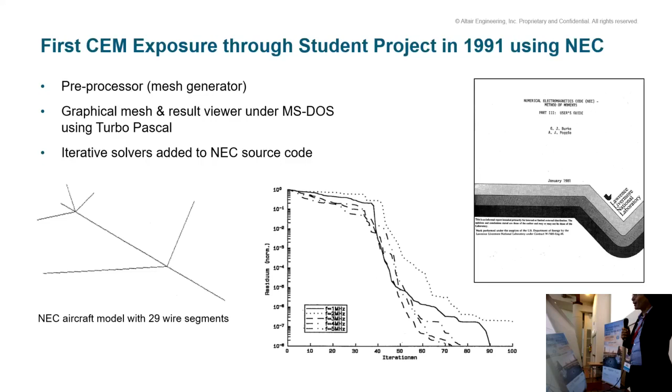What you see here is an aircraft model back then, with 29 wire segments, and this was useful. As time passes, I will show you later - 34 years later - these are the type of aircraft models we solve with all the details.

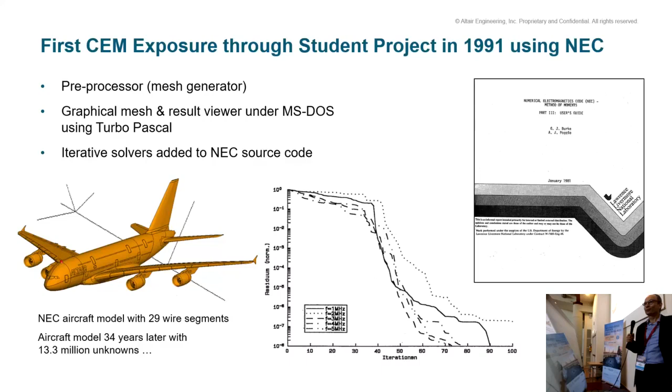Sometimes everybody inside wants to have wireless communication, so one does propagation modeling inside, to decide where to put the wireless repeaters. I just saw last week one of our results - of course, the most important people in business class sit in front, and you must make sure that also in the very front seat you have the best radio coverage, good data bandwidth. Interestingly, this model has 13.3 million unknowns. With the advances in computing power, which I'll show later, it almost takes the same time to solve this problem - from 29 unknowns to 13.3 million, much more accurate.

So this is a bit the underlying theme of this presentation, to take you through evolutions in the methods and the computation. Just to round off my personal story, in the same year, 1991, I started my master thesis, and I was tasked - I think we were actually the same research group - with a German ministry funded R&D project on EMC, shielding, truck cabins. So I started to write a software, with RWG basis functions, which became FEKO, based on method of moments.

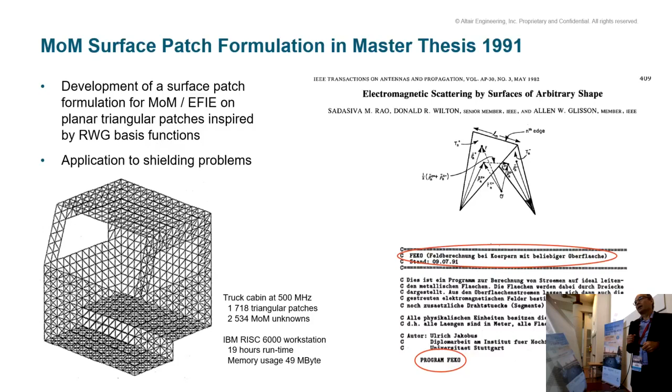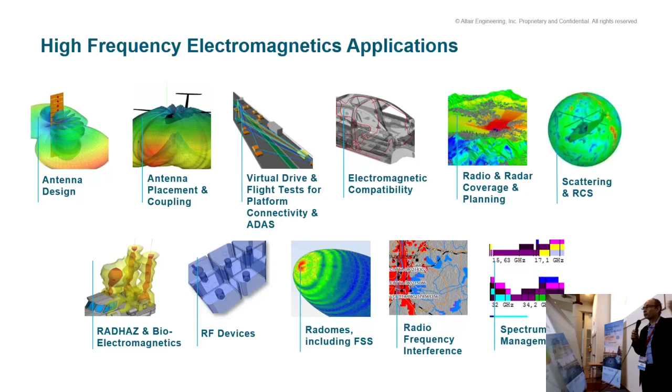Of course, there are many more problems apart from EMC in radio science, computational electromagnetics, antenna design. Very important to take the environment into account where the antenna operates - antenna placement, looking at unwanted effects, not only from EMC, EMI, cable harness coupling, but also bioelectromagnetics, and I see there's another plenary talk on that. Up to, as I've already mentioned, propagation modeling for in-cabin scenarios like in an aircraft, but also, of course, mobile communications within urban and rural environments.

All these problems can be classified a bit by the complexity - simple wire antennas up to very complex structures with many materials. But also a very important criterion for computational electromagnetics is the so-called electrical size, that's the size in terms of the wavelength - is it electrically small, electrically large?

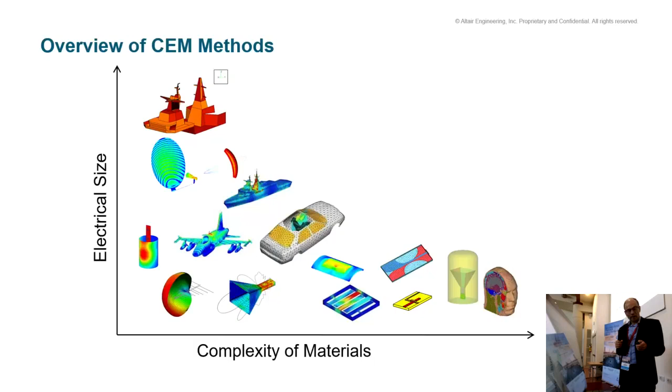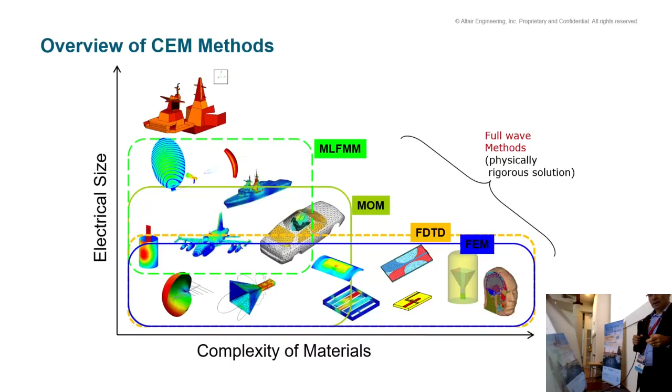Dependent on which problem one deals with, there are different methods, many more, that can be classified as full wave methods - finite element method, finite difference time domain, method of moments, accelerated versions like AIM or MLFMM - but there are also high frequency methods based on optics, physical optics, ray launching, geometrical optics, or some call it shooting and bouncing rays, uniform theory of diffraction. What is very attractive is actually to combine these two, because sometimes you will have a simple wire antenna mounted on a ship, and there is not one method able to deal with both - this is kind of the combination, combining different methods to solve the same problem, taking all the mutual coupling into account.

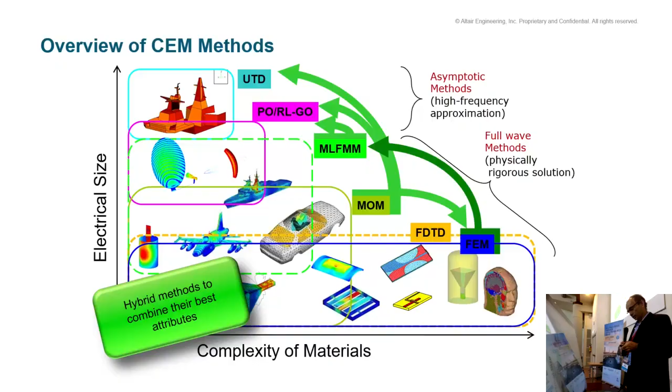The first, and I'm really touching on the high level in this presentation, on the different methods. First combination, and it's very popular, done by many research groups for many years or decades, is combining finite element method with integral equation methods, or also the accelerated version, MLFMM.

The motivation for doing so is sometimes one has complex problems like human phantoms, different materials, volumetric problems, exposed to electromagnetic structures which can be closed like a cell phone. Then actually everything can be solved with finite element, finite time domain, but it can also be far away, like here, this is human exposure to a base station antenna, which might be 10 meters on top of a building across the road or something like this.

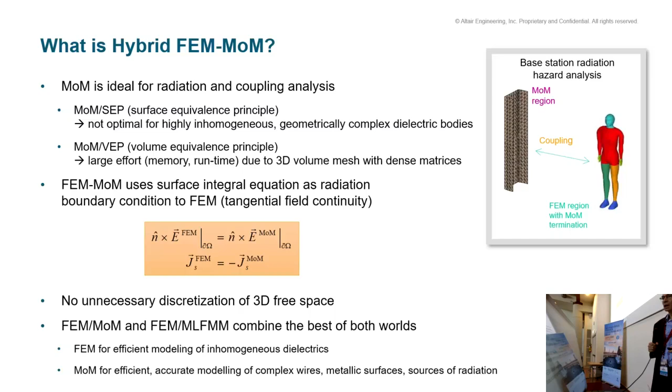And there again, for these type of metallic structures, integral equations are very suitable, but finite element discretizing the whole space, the whole road, the airspace in between, will blow up the computational problem. So coupling these methods, leveraging the best of both technologies, is a very attractive way of doing so.

You see here one example. This is a human body exposed to an MRI system. There is a bone implant, and one can, with this hybrid method, model the electromagnetic fields in these MRI systems with integral equations coupled into the human phantoms through finite element.

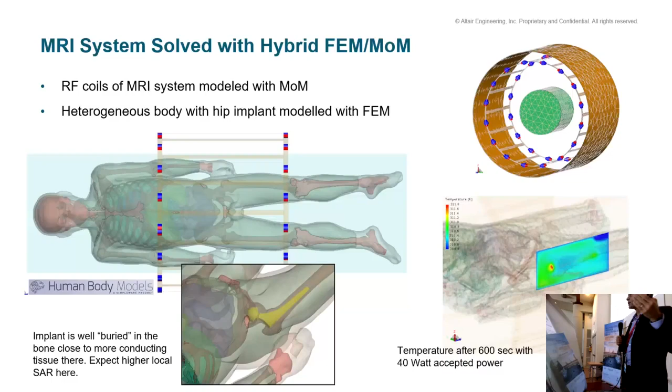I will only later touch on multiphysics, but this is already the first example. Knowing the field distribution around that bone implant, one can couple with thermal solutions to also get the temperature distribution, which is really the critical quantity to ensure it is safe to put patients with such implants into such MRI systems or not.

Another hybrid method, and this is also where I personally through my PhD got involved, is combining full wave methods with high frequency asymptotic methods to solve problems that are electrically large. I think this evolution over the last decades, what is electrically large, what is the boundary where a full wave method is still acceptable to use, has shifted tremendously.

There's almost this constant, an engineer is willing to wait a night for a result. Earlier it was a small problem you could solve overnight, or maybe sometimes you can afford to wait a weekend - you submit a job on Friday, but Monday you want the results. These days, of course, much larger problems can be solved full wave.

But I think what is interesting is in communications, frequencies get always higher and higher. We are now already doing hundreds of gigahertz, terahertz communications. The problems people are interested in solving are getting larger and larger. Earlier you were fine to model an antenna in a small region around it. Now you want to model the whole aircraft, the whole ship, in ranges of gigahertz. So this is why these methods always remain relevant and important, just the boundary where they are used shifts.

Combining method of moments with physical optics is very attractive because both of them are based on modeling or representing currents as an intermediate quantity before then in the second step evaluating the scattered or radiated electromagnetic fields.

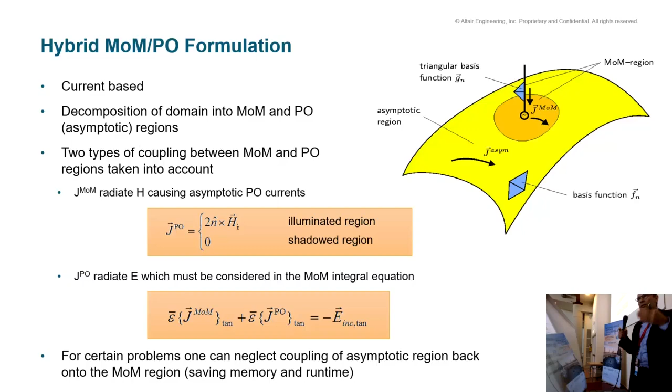This can be solved as a closed form system, changing the method of moments matrix equations. It is also possible to do that, we quickly jump to this slide, in an iterative way, very much as I just described it. Both methods are good.

And here just one example. This is a Cassegrain horn antenna with a subreflector, main reflector. The horn antenna and the small first subreflector are assigned to the method of moments, or in this case MLFMM, the accelerated version of the integral equations region. The main reflector is dealt with physical optics.

Also by doing it this way, one avoids having double reflections in the PO region, which can sometimes be time consuming. You see here three results: the blue reference solution, everything full wave; the red hybrid method, MLFMM and PO; and another solution, the dashed line, which we call large element physical optics. This uses mesh elements that are a few lambda in size with phase variation, not electrically small elements. Overall, all three methods agree very well.

This is a zoomed view around the main beam. You hardly realize there are three curves. Only if one looks far away at the side lobes, about 70 dB below the main level, is there a difference with the dashed line. But this is not because the solution is inaccurate. It's because we use a large mesh, a few lambda, to represent that curved surface, so we are actually solving a different problem than the other two solutions.

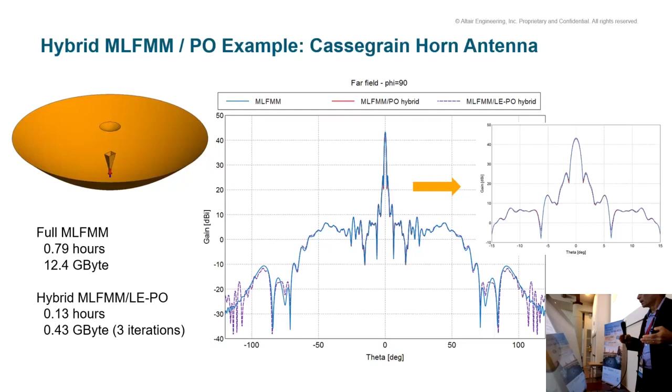Shooting and bouncing rays, or ray launching geometric optics, is also a technique used very often and popular for electrically large systems, and it can be hybridized with the method of moments in a similar way to what I just described. It basically launches rays from a source, which could be a point source antenna or an incident plane wave field. These ray beams interact with the geometry. If these are metallic structures, there will be purely reflection, similar to the PO currents. There could also be metallic dielectric structures with partial penetration, transmission, partial reflection, and so forth, with multiple bounces. One can complement these techniques with creeping waves, edge diffraction, adaptive ray splitting, and other fancy things.

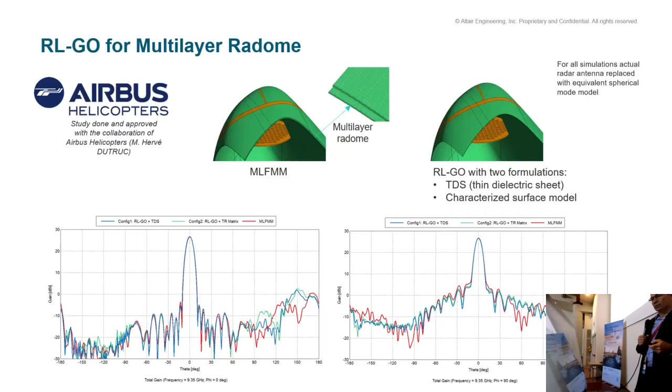Just an example, again comparing with full wave. This is a project modeling radomes around the front section of a helicopter with frequency selective surface elements to protect weather radar antennas and so forth. You see here a full wave solution with a multi-layer radome, including the FSS structures. On the right, you see shooting and bouncing ray methods, where one can accelerate the solution by creating lookup tables, evaluating the reflection and transmission coefficients of such radomes as a function of frequency, angle of incidence, polarization, and using those as part of the ray structure interaction formulations. You see very nice agreement here too.

I want to point out another improvement that has emerged in the last few years, similar to what I referred to earlier with the large element physical optics. Also here, the higher the frequency, normally the more rays need to be launched to still satisfy Nyquist criteria, having at least two rays hit the structure per wavelength or so, which again provides a limit if the structure gets really electrically large.

Here we have a whole ship at 10 gigahertz, and we look at the near field exposure radiation hazard in this area. This is the near field plot. By combining different methods, we launch electrically large ray beams which can really be 10 to 30 lambda in extent, and these big ray beams hit the structure. Sometimes they will hit a uniform, flat, smooth surface, and nothing needs to be done other than making sure one properly evaluates the radiated fields accurately over this large cross-section.

It's of course not sufficient to represent it by a single point integration. There might be situations where the ray beam partly hits an edge and partly misses it, so we need adaptive splitting and other fancy techniques. With such operations, in this example, instead of 442 million rays, one can reduce it to 367,000, meaning a factor of 230 faster in runtime, without any change in the results.

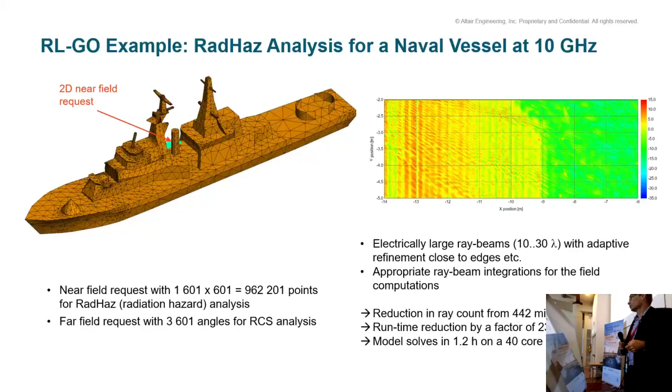This is now the last method I'd like to introduce quickly, which is the uniform theory of diffraction, also around for decades. It's not ray launching in some grid onto the structure and letting it interact. It's really having a source point and an observation point, then finding the rays through ray tracing that are either direct line of sight, reflection, multiple reflections, diffractions, creeping rays, and so forth. Traditionally, one often has canonical objects, and geometries need to be relatively canonical to apply UTD principles.

There have also been evolutions to apply UTD to general, arbitrarily curved structures, like here, where it's not so easy to identify what are the flat parts and where the edges are, and so forth.

But it makes it much more realistic, and this is the expectation. Nobody will buy into the next generation of antenna design if you use a crude model like this.

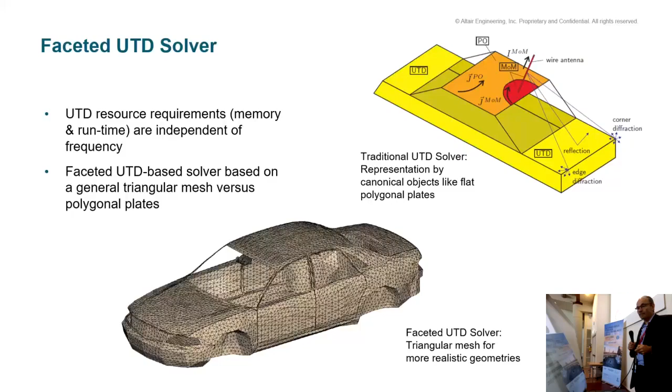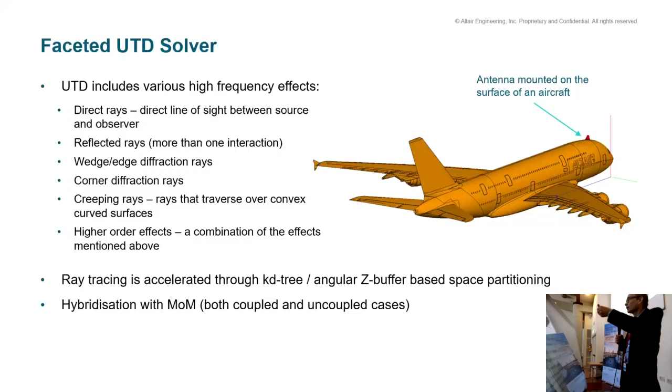This is where I come back to a more modern aircraft, now not with MLFMM, 30 million unknowns, but purely UTD. There have been many methods and extensions, especially on the geometrical processing side, to accelerate ray tracing, which in this case is often the bottleneck—not the computation of fields, but finding the rays in the first place.

I want to show one example, a method which is truly frequency independent. If you solve a structure—this is antenna placement on a helicopter—at 1 gigahertz or 2 gigahertz, nothing changes except the fields that are computed. But the rays, if the mesh and geometry are the same, the ray paths are the same. So this method is truly scalable as frequencies go up, and it's very attractive in terms of runtime.

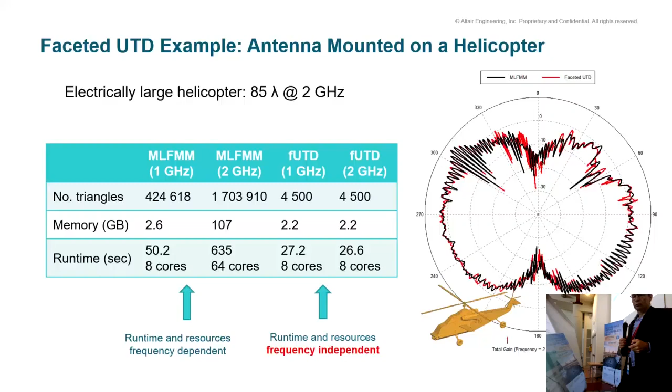What makes it more challenging is combining it with full wave methods. It's easy with physical optics, where everything is based on currents. Here, some structures are based on UTD with fields and ray tracing, and others on currents. So one needs special hybrid basis functions to model the connections.

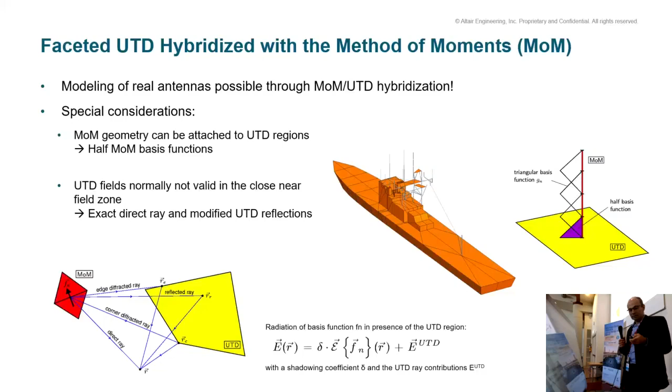Also, sources for UTD normally need a certain separation—they need to be in the far field. But if you have antennas mounted on a structure, you're not in the far field, you're actually connected. All of this can be solved, and one can get very accurate solutions.

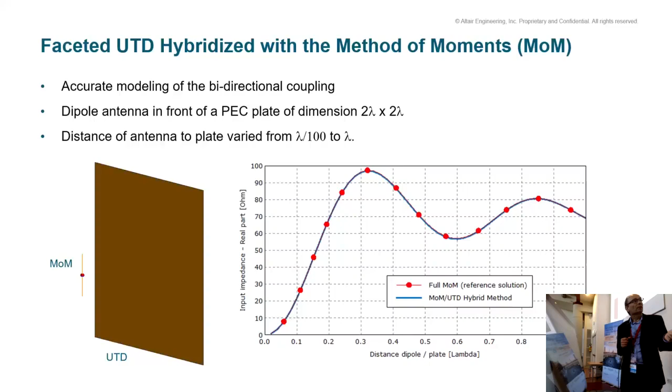This shows a simple academic problem: a UTD plate, method of moments, dipole antenna, with the distance changing. This shows the input impedance of the antenna, full wave compared to the hybrid method, taking all the coupling into account—you see very, very close, almost touching. It still works perfectly.

Concluding this general overview of different computational electromagnetics methods, full wave and high frequency, I want to move on to some problems which remain challenging with these methods, but where there are special solutions. Unfortunately I had to be very restrictive in what I select, given the time constraints, and I try to be relevant to the challenges practical antenna design engineers face day to day.

One of those, for the last 20 years, has been that nobody wants to drive around in a car with antennas sticking out that can be broken—you forget to move it when you have your car washed, and it's broken. As more communication systems evolve, all these antennas are integrated somehow.

One of these technologies is to leverage the wires. Often, due to the heating system in the rear window of a car, there are already wires embedded, and one can leverage these as integrated windscreen antennas. It might look simple, but in reality it is not, because this is not just a glass with one wire printed on top. It's a multi-layer structure, with up to 7 different layers of different complex materials.

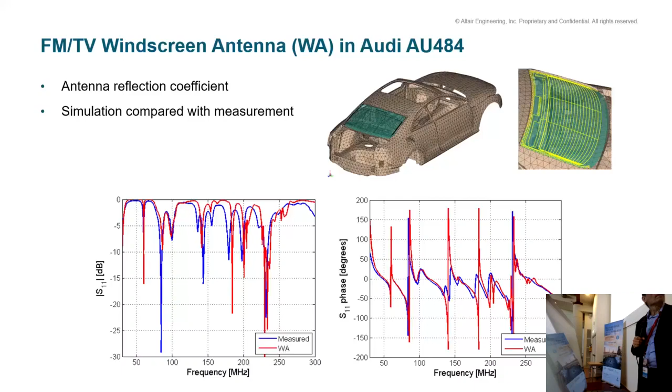Another challenging but very relevant problem is modeling electromagnetic interference susceptibility for cable harnesses, combined with other structures like a windscreen antenna. So this is, for instance, a windscreen antenna and a car structure, and in a car, of course, it's not just these two cables—you have kilometers of cable harnesses with complex bundles and multi-layer hierarchical structures.

There can be individual wires which have a shield, and they are part of another higher level bundle with another shield. Modeling this is extremely complex. You can't just say we'll discretize everything—kilometers of cables with multiple wires and multiple hierarchical shields, it's impossible. It's possible for a simple setup, like one wire in the laboratory running on a table, such as a CISPR 25 setup, but in reality it's not.

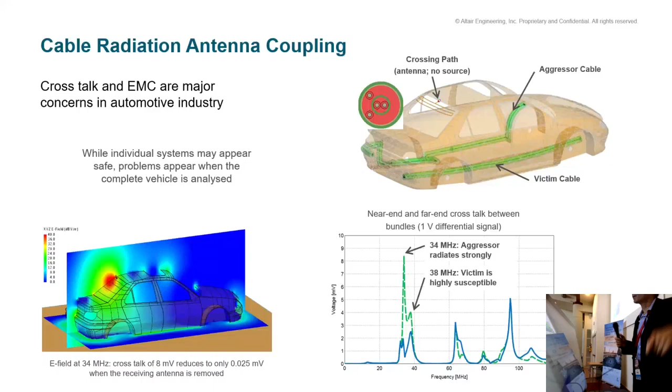But also here, luckily, there are solutions. One can combine full wave or asymptotic electromagnetic techniques, touched on earlier in the presentation, with MTL, the multi-conductor transmission line theory, which converts all these internal details of complex cable bundles into an equivalent SPICE network of circuit elements, which can be solved with a SPICE solver.

So essentially, the electromagnetic field problem is reduced to solving the interaction of the structure with the outer shield, which is represented as a single wire, one could say. With the transfer impedance, one can go into the interior of the cable, the outer cable shield, and solve everything inside with a circuit solver.

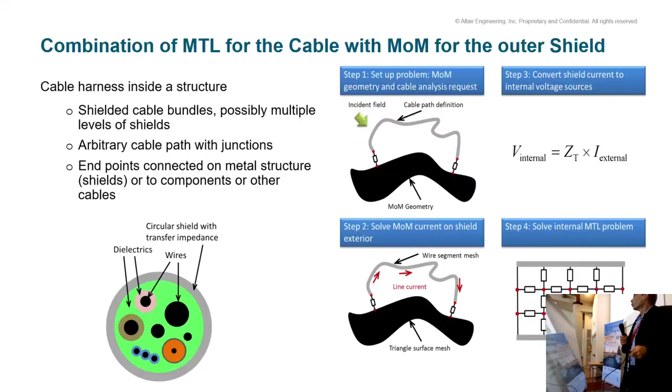Also here, it's important—if you do that, you end up with SPICE net lists which can have hundreds of thousands of circuit nodes. We've compared, for instance, Berkeley, the original Berkeley SPICE solver, or NG-SPICE, the next generation SPICE, an open source project. One can use those general purpose circuit solvers, but one can also tune and optimize a circuit solver tailored for these types of net lists that emerge from cable harnesses.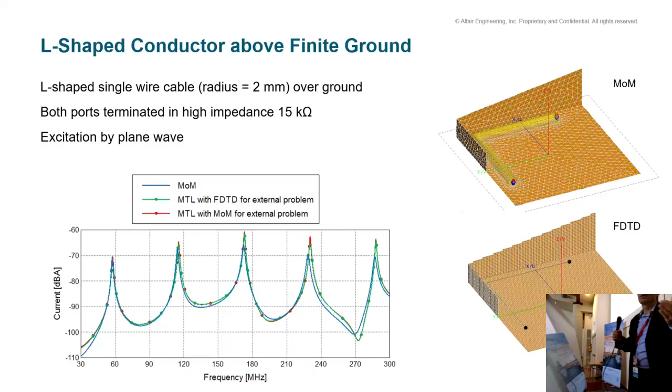You see here, for purposes of EMC coupling, reasonable agreement. It's not perfect—there are some differences for some reasons, but people dealing with these problems are very happy to get this type of accuracy. More complex problems can, of course, be solved. Apologies, we can't really see the cables here, but there are actually some cables running. These are cable ports, and one can look at the induced currents—applying these techniques to more complex problems.

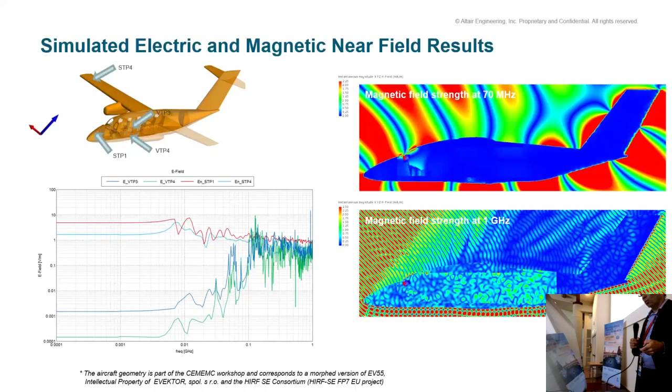Another more advanced feature is not only splitting up a problem and using different methods, as in hybridization, but going one step further to really do model or domain decomposition. A nice example is here.

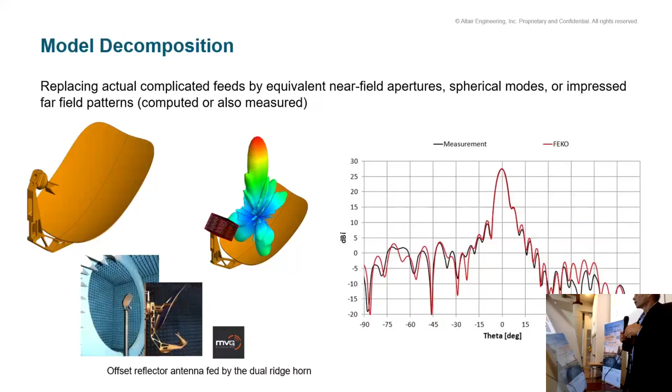A feed structure illuminating a reflector, a dual-ridged horn structure, where one can even combine measurements and computational electromagnetics. In this case, the horn antenna was measured, the near field was collected on a box around it, and this equivalent near field aperture was used in the computational electromagnetic solution as excitation to look at the interaction with the reflector.

But this kind of splitting up domains is not only limited to combining measurement and computational electromagnetics. One can also apply the same principle to splitting up a large complex electromagnetic problem as such. This shows, for instance, a slotted waveguide array—very similar to the earlier helicopter example with shooting and bouncing rays. Here we have again a slotted waveguide array example as a radar or weather radar antenna.

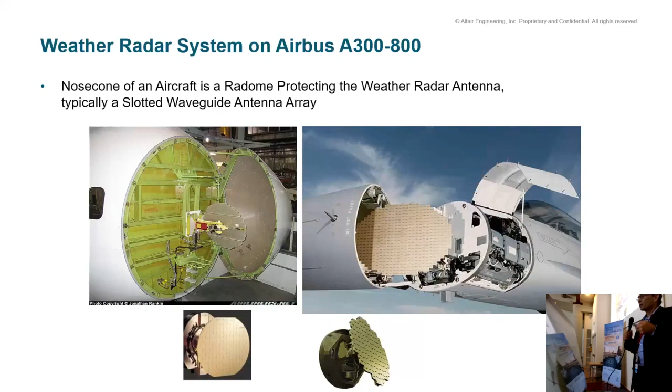In the front section of an aircraft, there is a radome which has frequency selective surface elements, and solving the whole problem can be too time-consuming and might require too much memory, so one can split it up. As a first step, solve the slotted waveguide antenna in free space, obtaining near field on an aperture, spherical mode representation, or even a far field pattern, as in the early example with measurements.

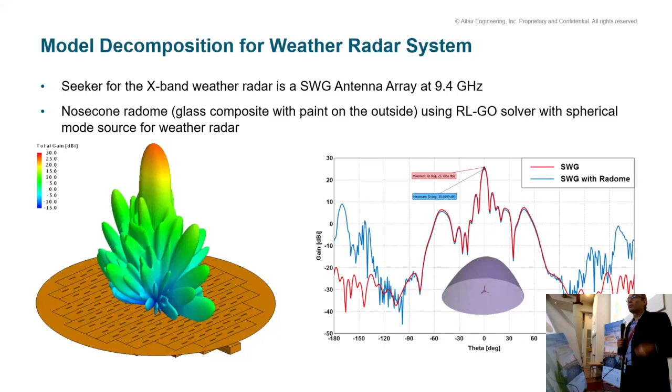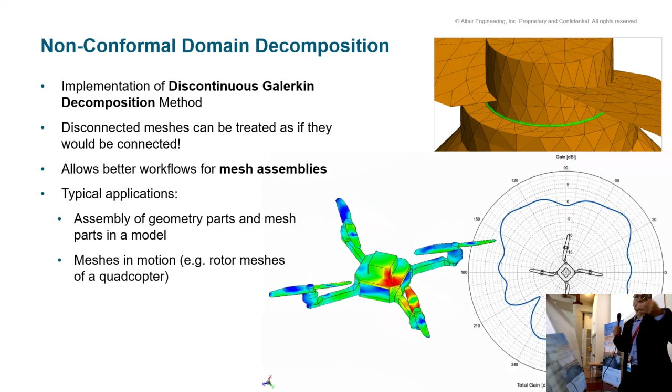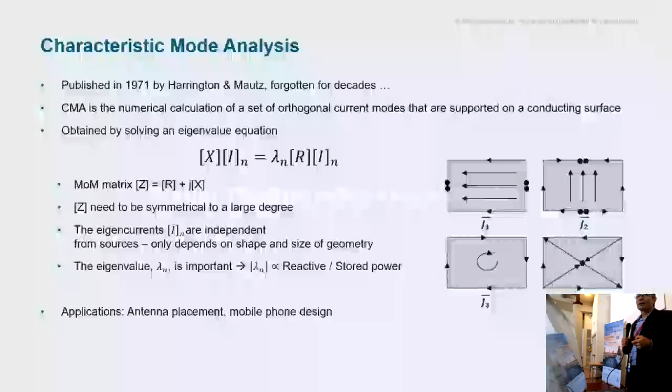I thought I'd put this part here on characteristic mode analysis, which is also a kind of advanced solution. It's not new, it was developed in 1971 or earlier. There was some work by Garbacz, and then Harrington and Mautz published it in 1971. But nobody really seemed to care, nobody knew what to do about it, and it got forgotten. But in the last 10 years it really came back as a very powerful tool to understand how structures can radiate and how antenna design can be mastered efficiently, leveraging not only the antenna but the whole structure.

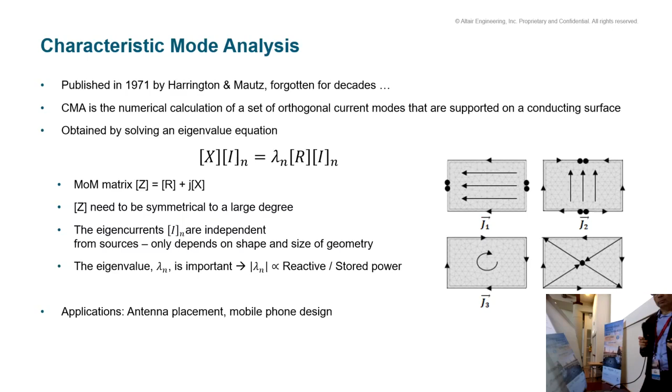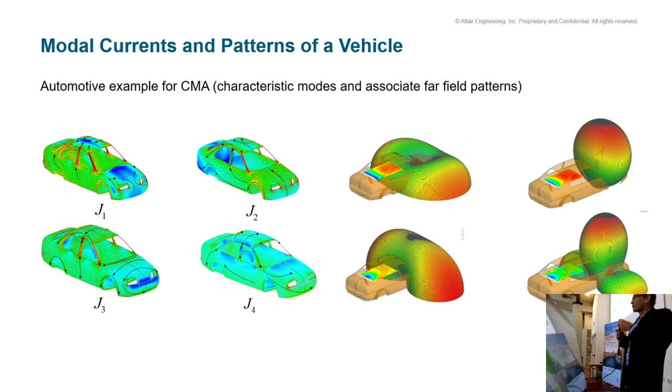Essentially it's based on method of moments, splitting the method of moments matrix into real and imaginary parts, solving an eigenvalue problem, and one gets these so-called characteristic modes. Each mode also has a far-field and near-field distribution, and knowing how a specific structure can be excited and can already radiate allows, in a much more intuitive way, to excite those structures through antennas and leverage not just the antenna, but the whole structure.

As part of these advanced methods, an evolution has also happened over the last decades related to propagation modeling. With our ever more connected world, with IoT sensors, mobile communications, wireless LAN, evolution from 5G to 6G and so forth, it's always more important to have sophisticated and also fast models. Sometimes people want real time, as certain things move around, like a car moving in a city, one wants real time evaluations of certain communication systems.

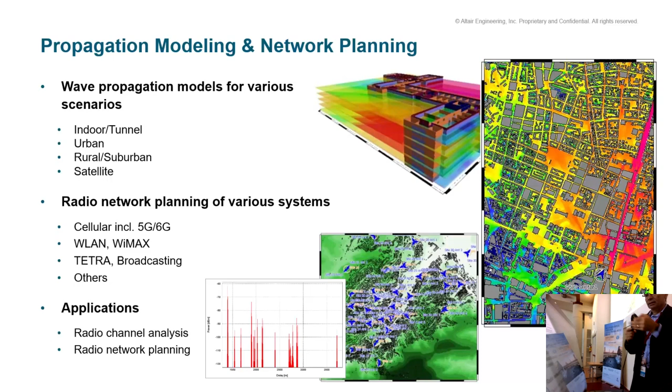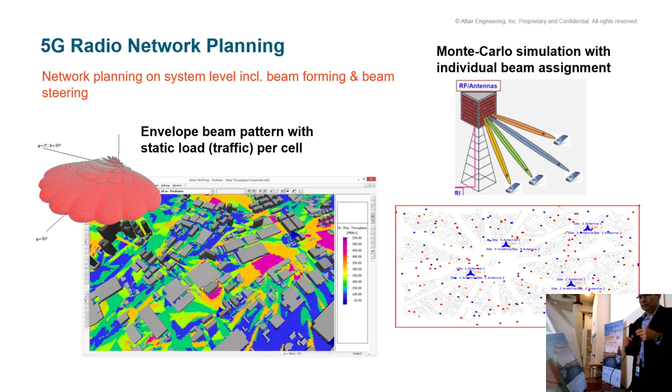There has also been an evolution in different technologies based on what I introduced earlier, shooting and bouncing rays, ray tracing, and many heuristic propagation models that can describe these different things. For 5G and 6G it's even more complicated, combined with different beam steering and multi-beam pattern antennas. There are also special sessions and papers here at this conference about reconfigurable intelligent surfaces, where one can have passive arrays mounted on walls that selectively steer the beam in certain directions, where there's maybe a group of pedestrians needing more bandwidth and coverage in a specific street not directly visible from the base station.

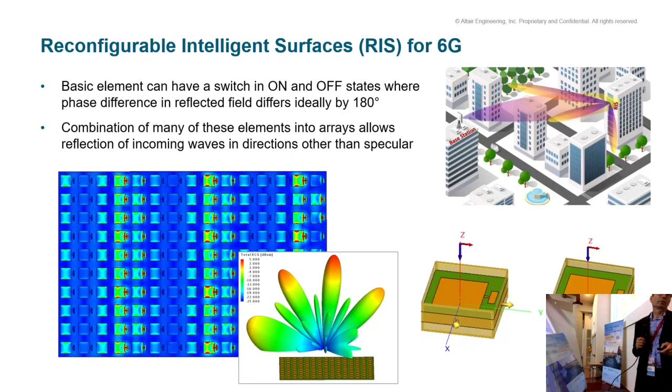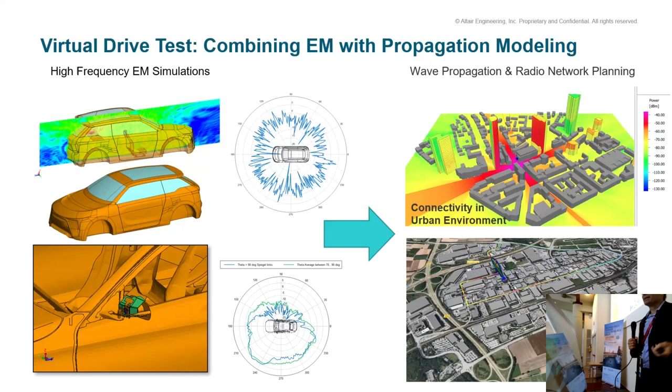All these are, of course, supported and driven by the advances in computational electromagnetics. Combining, for instance, what I touched on earlier with the windscreen antenna, this is now another modern design of hiding the antenna in the outer mirror. One can also use the methods I introduced earlier to compute radiation patterns of such an antenna, put that vehicle in an urban scenario, let it drive around with ray tracing combined, and replace or complement these drive tests with virtual drive tests in the computer.

This shows one result of a measurement campaign and the corresponding simulations. It's important to notice that if you repeat the measurement five times, you will get five different results. There might have been rain, the ground suddenly wet, completely different conditions. A truck might pass by at one position, causing blockage for a few seconds, and if you drive the same road an hour later there might be no truck at that position, or one a bit earlier instead. So it's really a few dB up and down, nobody cares, it's about looking at averages.

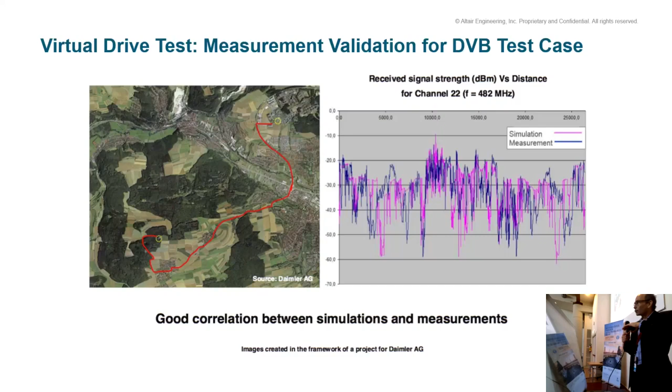I think I like this story very much, showing that computational electromagnetics is not only relevant on Earth. This was a study by NASA Jet Propulsion Laboratory ahead of the Mars mission, looking at the communication link between the Mars Perseverance rover and the Ingenuity helicopter. What is very important, as this helicopter is flying around on Mars, is that it does not lose the radio communication link to the base station, because otherwise the base station can't tell it anymore, please turn around now - it will just be lost. That, of course, has a huge impact.

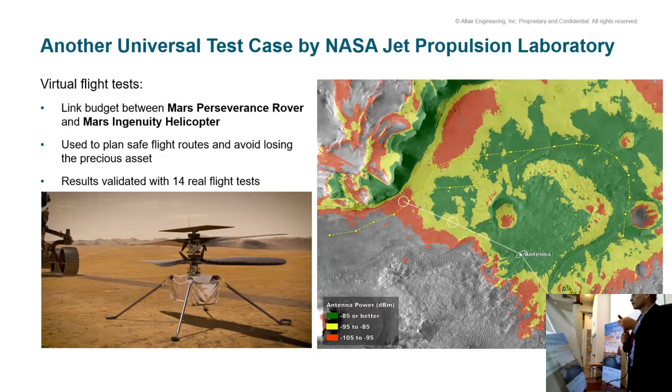So they did a lot of propagation modeling studies on Mars. I don't have all the results, but when the mission happened, it was recording the signal strength in real time while on Mars, and later on they were comparing it to the simulations done ahead of time, and it matched really well.

Leaving that block of computational methods and some advances, let's touch a bit on some multiphysics structures. I had already shown the thermal impact of EM fields for that MRI example. Sometimes there are also pure structural mechanical implications, like here a radio astronomy antenna, which is of course a big massive structure which has weight, and depending on the angle there is a different effect of gravity. Gravity causes deformation, there might be wind impact, so one can actually combine computational electromagnetics with structural analysis - for each position, look at the deformation, use the modified geometry, repeat the electromagnetic analysis, and you can actually see changes in the radiation pattern just due to these deformations.

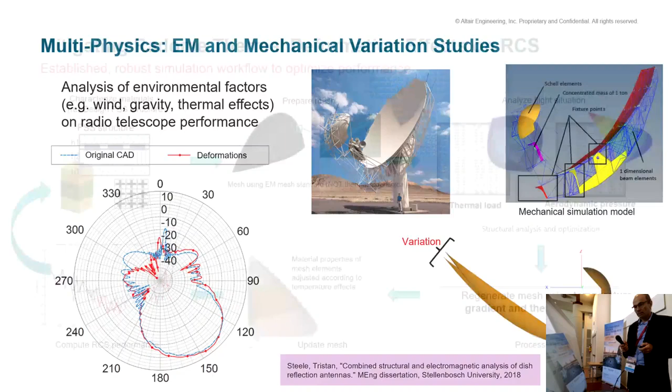Another multiphysics coupling I want to show is again related to radomes, which I had already two other examples of in this talk. A radome is not standing still on Earth - typically a radome in front of an aircraft, and this aircraft will fly. In flight there is aerodynamic pressure, which causes deformations, but also causes heat. That heat will change the material properties, so it's also a kind of multi-dimensional coupled multiphysics problem, where the electromagnetic properties of the radome change if you measure it in an anechoic chamber on ground versus if you operate it in flight at high speed with all these impacts. Also, by coupling different electromagnetic, structural and thermodynamics codes, these problems can be addressed.

All these multiphysics electromagnetics codes or numerical algorithms rely, of course, on computing hardware, high-performance computing. I've put here a bit of the evolution from the 90s up to today of the top 500 supercomputers, and this gives the lowest of these 500, the average, and the top computing power expressed in floating point operations per second. Every grid here is a decade, factor 10 faster. So you see already here, we have gone through a huge evolution in the last decades.

But I think it's important to realize there is a benefit which one gets for free out of that. But, and many of you are of course active in this domain, I think it's always still very important - and this is actually my first bullet item here - one needs to have smart and powerful algorithms in the first place, like going from an n-squared or n-to-the-power-of-3 algorithm to something like n log n. That will always beat any advances in computing power. And you can still leverage, of course, the advances in computing power as an additional acceleration. So this is always where to start.

But then once one has a great scaling algorithm, which is still accurate enough for the given problem, then one can and should, of course, leverage all those modern architectures like distributed and shared memory parallelization, GPU computing, use special libraries where others have provided low-level assembly level mathematical algorithms, and so forth.

Coming back again a bit into history, I was privileged enough in 1997 to get access at the Computational Center at the University of Stuttgart to a Cray supercomputer. It was very expensive - every CPU minute one was billed and had to justify why one needs this. And I was able to solve this problem there.

Let me explain a bit. There is an automatic landing system at the end of the runway at an airport, and it provides the signal for incoming aircraft to land.

And it's a highly sensitive signal. It's almost like the incoming aircraft is on a null of the pattern of this system.

But of course, as you all know, you've been sitting there for half an hour waiting for takeoff. Along the runway there's the taxiway, where aircraft queue up to wait for their turn to start. These aircraft next to the runway are kind of electromagnetic scattering objects.

This is what is indicated here in red, the error due to the presence of these aircraft. And it's very important, of course, not to have a disturbance high enough to affect the incoming aircraft landing along or next to the runway, but to still have a safe incoming flight.

So I was solving this problem on a Cray T3E supercomputer, method of moments, 36,000 basis functions. This machine had 512 CPUs. Back then, of course, one CPU had one core. I could use 384. It was running 1.7 hours, so the CPU time was 27 days.

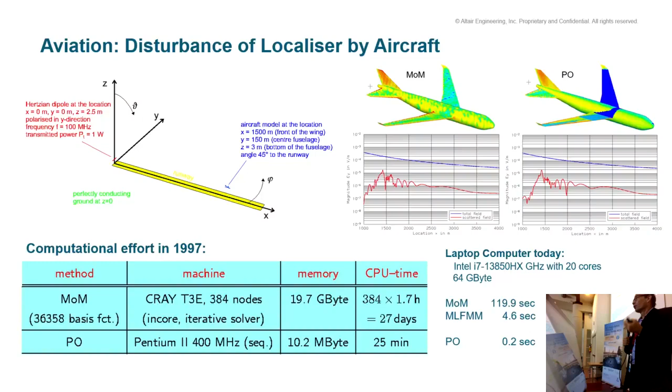With MLFMM, it's even less than 5 seconds. Physical optics, fractions of a second. So this also shows, in practical terms, not just these graphs and floating point operations, what it means in terms of impact for computational electromagnetics, what the advances in computing power have brought us over the last couple of decades.

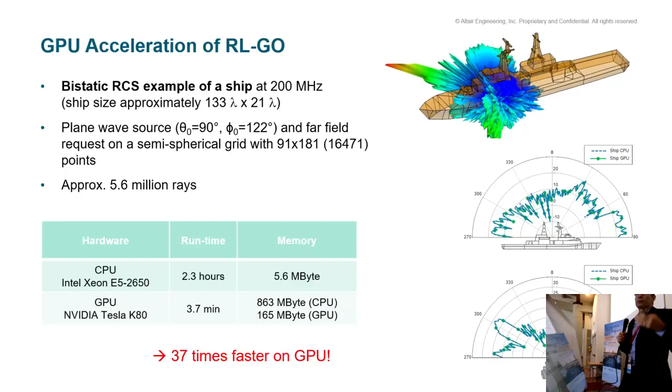GPU acceleration, I have just one example as part of shooting and bouncing rays. Here it's about 40 times faster leveraging GPU instead of CPU for a shooting and bouncing ray problem.

My last block before coming to the conclusion is devoted to AI and ML, where one sometimes hears these fears or slogans, oh, this will replace all engineers in future, all the decisions will be AI-driven. There are, I think, and I would hope I can show this to you, certain elements where it can really help to get to better solutions faster, but it's really only complementing traditional solutions like measurements or computational electromagnetics to create certain data points.

And machine learning is actually nothing that fancy, it's more mathematics. You have a set of data, either existing historical data that was collected, or data generated through measurements or computational electromagnetics. One trains machine learning models, has other data, evaluates whether the model is sufficiently accurate or not. If not, there's an evolution, a retraining phase, and in the end it's applied, and it's also important that one knows the bounds of confidence within these bounds.

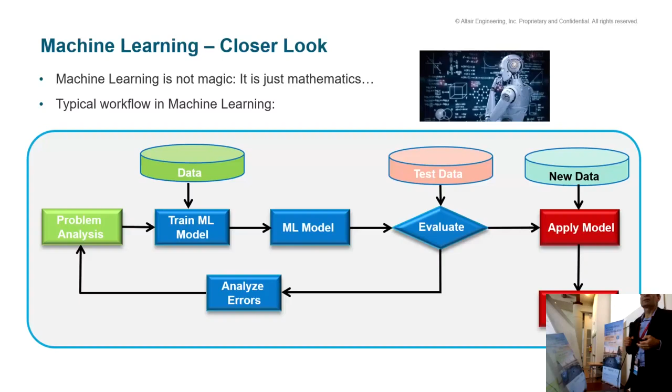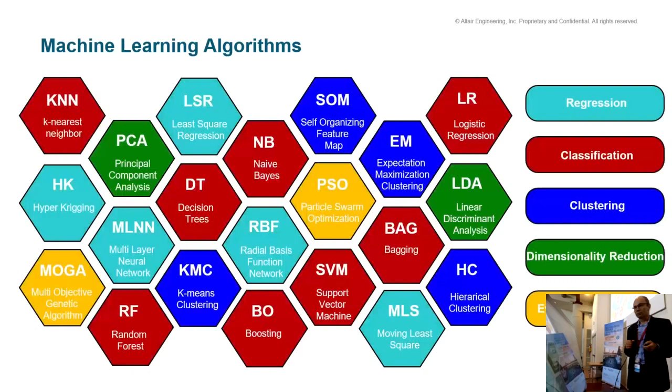It can be applied also to new inputs to create results much faster than if you have to build a prototype and do measurements, or redo your computational electromagnetic simulation. There are many, many machine learning algorithms, of course, way beyond the scope of this presentation to discuss. They can be classified into certain groups, but I would just like to show you a few examples.

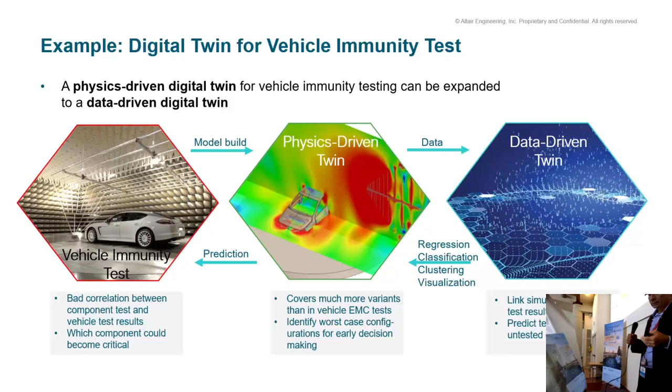The first one is more related to data processing. Often one is challenged by the complexity of certain problems. So this is an EMC related vehicle immunity test. There's a vehicle exposed to electromagnetic fields, and one has to decide on certain critical aspects.

Let's go to this example. There are different components in this vehicle, and of course in reality there are even more. Here in this test, 30 different components or different positions were considered. The frequency is, of course, a variable here, 20 to 400 megahertz, with different polarization of the incident field and orientation of the antenna.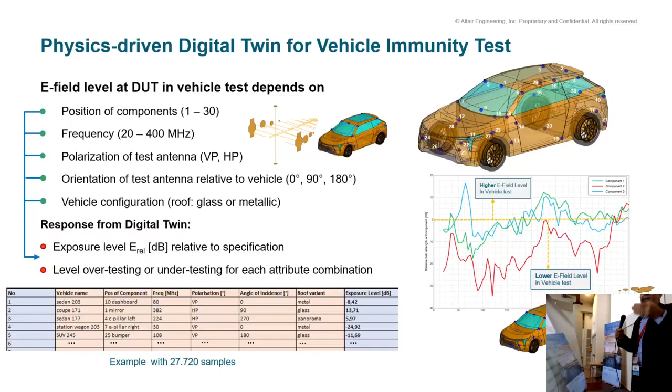But also, as you all know, if you order a car, there's not just one car. There are many different configurations and versions. Some have, for instance, a sunglass rooftop, others have metallic glass or metallic roof, and all these different combinations give you a huge number of variations. It's almost impossible to cover all those through numerical simulation, but yet you want to know what is the critical combination, is my specific device safe to be used?

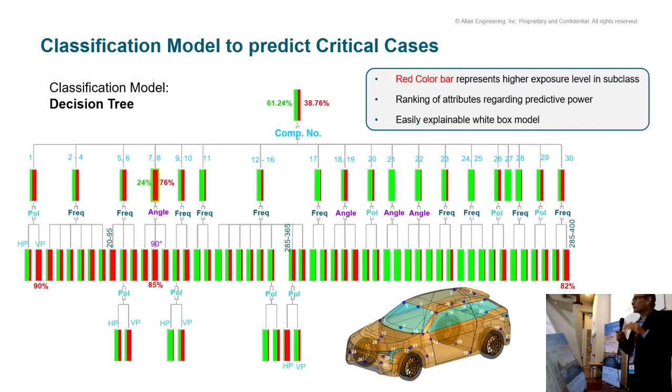Here it helps with machine learning and decision trees. For instance, just an example, to identify what is the critical combination, which component at which frequency for which car model is something that might exceed certain safety limits.

Another example where machine learning can really help reduce simulation time: an integrated radar antenna that was designed with many different parameters, widths, lengths, separations. When you manufacture it, there will be tolerances, and the task was to determine the sensitivity, whether certain combinations of tolerances would push the antenna outside the design specifications.

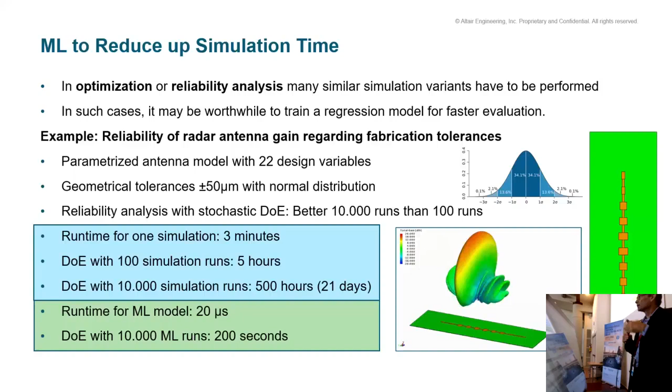You can set up a parametric study, a design of experiments, varying all these parameters. With heuristic assumptions, if one simulation takes 3 minutes, 100 simulations take 5 hours, and 10,000 combinations would take 21 days, scaling linearly with the number of combinations. But a machine learning model can be evaluated in about 20 microseconds, so 10,000 combinations would take 200 seconds instead of 21 days.

Another example relates to radar cross-section and design of stealth aircraft, though it's a bit difficult to see here. These are all different aircraft designs, some with longer wings, others with different tail sections. This is available historical design data that was used to train machine learning models.

These machine learning models, and this is very important, you shouldn't just blindly trust them. One needs to validate and verify with data sets that were not used to train them, to check whether results are still within the range of confidence. If yes, one can apply the model and get corresponding results in fractions of seconds.

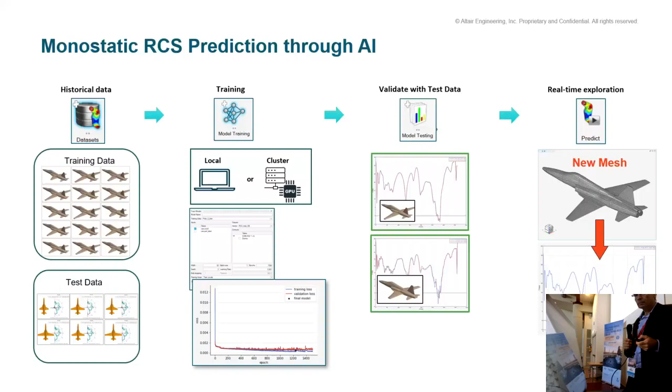The last example of how AI and machine learning can be used relates to setting up a 5G network communication system in downtown Munich. The goal was to reduce from originally 11 base stations to only 5, while still giving sufficiently large coverage, with a threshold of receiving field strength level of minus 80 dBm. With machine learning optimizing the positions and orientations of the antennas, that goal could be achieved.

This reduced power requirements significantly, which again has a huge impact on cost and operating costs for setting up such networks.

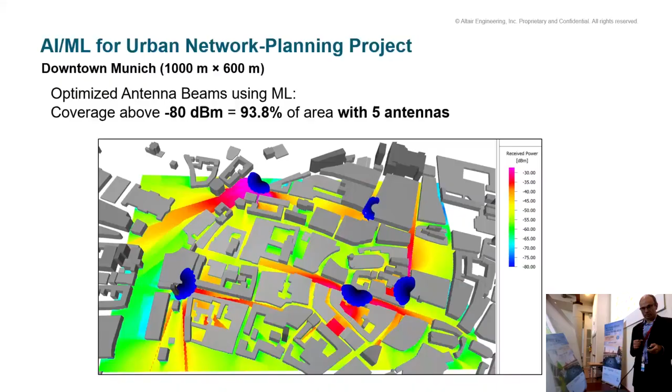With this last example of machine learning, I'd like to conclude and summarize this presentation. I started by giving an overview of computational electromagnetics: full wave methods, hybrid methods, high frequency asymptotic methods, and the combinations through hybrid methods as they have evolved over the last few decades.

I showed some challenging examples like windscreen antennas and cable harness modeling, where through other means very efficient solutions are possible, other than brute force application of computational electromagnetics. I also touched on multiphysics use cases, high performance computing, and in the last part, AI and machine learning.

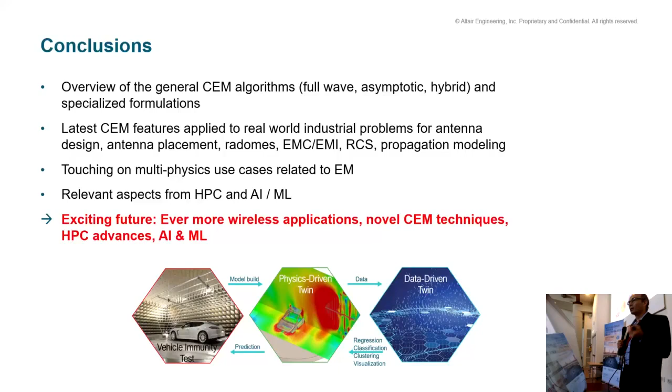As an outlook, I think computational electromagnetics and radio science in general have a brilliant future, driven by the ever more connected world: wireless sensors, wireless communication, so many applications driving innovation, new designs, and exploration of higher frequencies. All this is complemented by advances in novel computational electromagnetics techniques, many of which are covered throughout this week in the different sessions, supported by advances in high-performance computing.

Quantum computing is also emerging now, and of course AI and ML if used in the correct context. I've also seen approaches where someone says, oh, we don't need to solve Maxwell's equations anymore, we just put it into DeepSeek or ChatGPT and they will give us the answer. That is for sure not the case at the moment, and it will still take some time. Thank you very much for your attention.

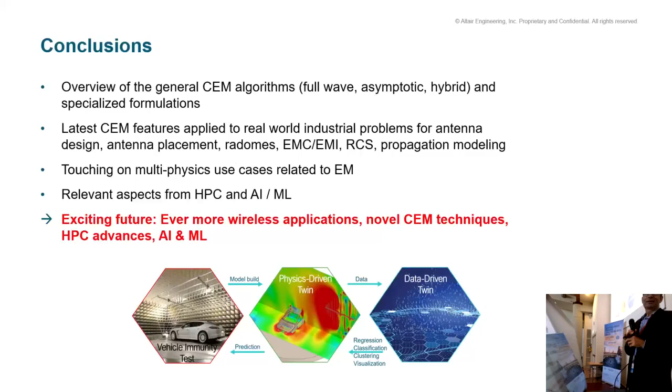Thank you, very nice presentation. Can everybody hear him? I'll shout louder. You showed one example with a dipole in front of a square plate, and you showed a UTD formulation, a UTD result. What did you do with the corners in that case?

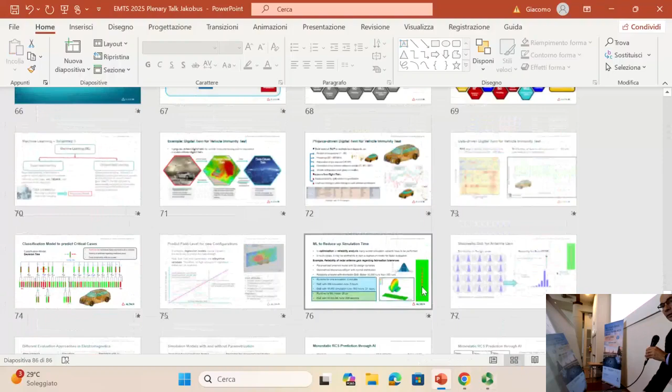Let me see if I can quickly find this slide again. The question, if maybe not everybody at the back could hear, relates to this example of the UTD plate.

This dipole antenna in front of a plate, and your question is to the spot. Indeed, the edges and corners did consider edge diffraction, corner diffraction, but the requirement, and I touched on that a bit maybe in the previous slide, there are special formulations possible when these radiating sources are close to the UTD surface or even touching, through the image principle and so forth, which is accepted.

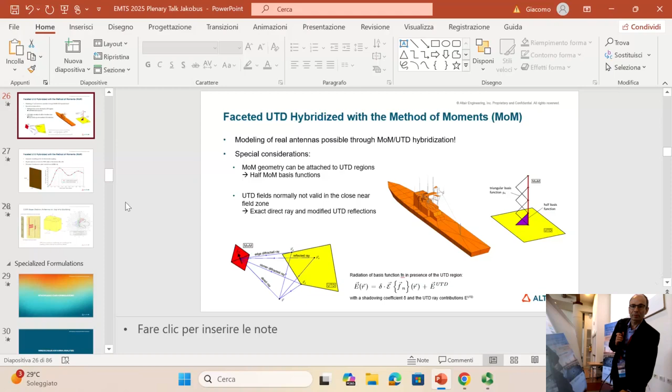However, they do not work if the source is close to an edge or a corner. So in this example, luckily, or maybe you could say I've kind of faked it a bit, because I've positioned this dipole - if you move it closer and closer, it moves towards the center of the plate.

No, my question was specifically, do you have a corner diffraction coefficient that you apply in this case? Yes. And where does that come from? Yes, there is corner diffraction, there is edge diffraction, but they are the standard formulations which still rely on an incident kind of far-field conditions.

So if you were to move that source closer and closer to the corner, we will not get that good match down to fractions per wavelength. No, but even with the distance, what is the standard formulation of a corner diffraction coefficient?

I implemented that as part of my PhD in 1994. I can't give you the literature reference anymore. I can't remember now which formulation. I know there are a few formulations, and with faceted UTD a few years ago, some of our team members revisited them again and compared a bit. They are kind of there to remove the discontinuity of the edge diffraction, if the diffraction point - but I don't have offhand which one. But they are still based on far field.

I grabbed the microphone because it's a similar question. Not to put you on the spot, but a very informative overview, as Ludger said, appreciative of that. But I know that some very popular programs like TCRA and XPatch, for their high frequency, they don't use UTD or GTD.

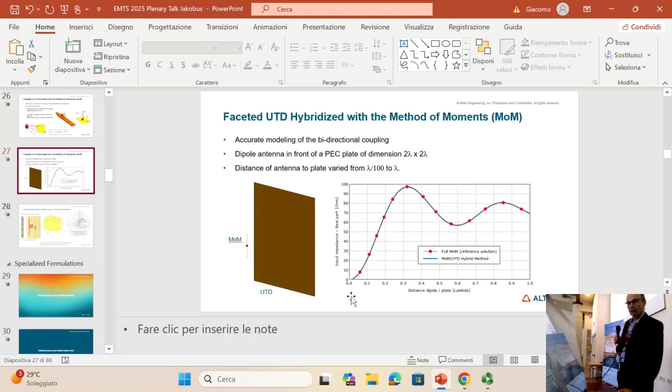I mentioned it kind of here. For the shooting and bouncing rays, or ray launching geometric optics, one often uses either PTD or ILDC to take diffraction effects into account. So it is possible, of course, and we also have it in FEKO, not as part of the UTD solution, but as part of physical optics and as part of the shooting and bouncing rays.

So you do incorporate ILDCs at times? Yes. Okay, thank you. No, it's important.

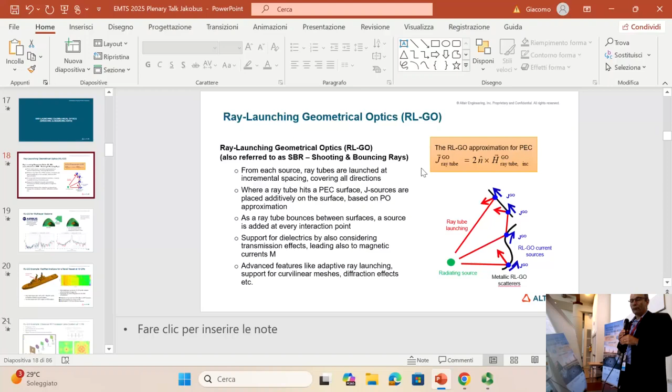And there are different algorithms, different methods, and I think it's often, especially maybe for the younger students, the fact that there are so many different methods is confusing on the one hand. I experience often people trying to put an antenna on a structure and they just use one of the full wave methods, Method of Moments, and they wonder, oh, my computer has now been running for 3 weeks and it's still going on. And of course, switching to high frequency asymptotics and so forth will make a huge impact.

But I think one of the - and actually this is, I should have put it into AI/ML - this is where I personally also see a big, maybe positive impact of AI/ML: to pack all that experience and knowledge of when which method or which diffraction coefficient maybe works best for which problem. Is it metallic? Is it dielectric? What is the angle? What is the frequency? All this knowledge can kind of automate a bit the decision of which method to use when.

Because it's not that you can just say, oh, these and these methods are outdated, they have no reason to exist anymore. There are always many cases where exactly this is the best choice, but it's difficult if one doesn't have the experience to know when which one is really the best. Or it doesn't have to be the best, but at least you shouldn't pick the worst.